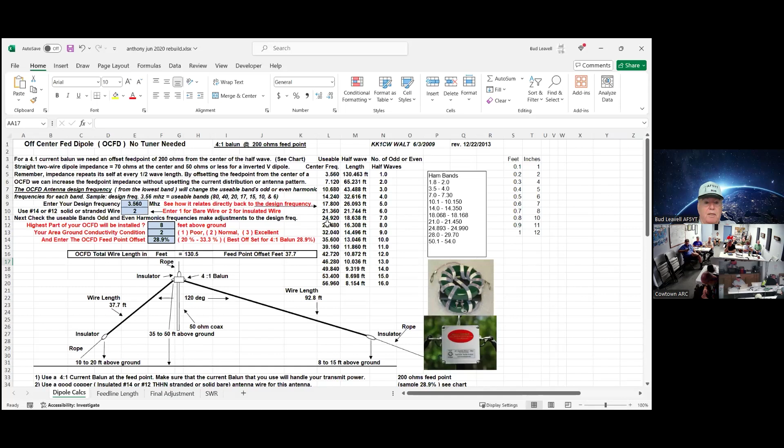Let's see. All right. So what you do with this thing is you start out up here at the top. Everything on any spreadsheet that I do, if it's blue, it's a data entry. If it's yellow, it's a calculated value. Don't change it. Look up there at the top. There's a frequency in megahertz that you place into this. In this case, I've got 3.560 megahertz as the starting point. So I want to build basically an 80 meter off center fed dipole. I can use this for any dipole, center fed or end fed, either way.

The next one underneath it is use number 14 or number 12 solid or stranded wire. This guy's smart. He was right on that. Enter a 1 for bare wire or 2 for insulated wire because the insulation will change the tuning slightly. Then why would you need insulated wire? You don't need insulated wire. You can choose and use either one, but insulated wire is easier to hide. Black wire is harder to see than shiny copper wire if you're trying to hide it.

So when you made the comment earlier about the insulation going off, the only real reason that you were concerned about that is for the aesthetics. Precisely. Well, now, when the insulation gets off of it completely, it will change the tuning of the wire a little bit. But if you follow my advice, you can always go back and tweak it, right? So no, it is not necessary to have insulated wire. I'm suggesting it because it's easier to hide. That's the only reason.

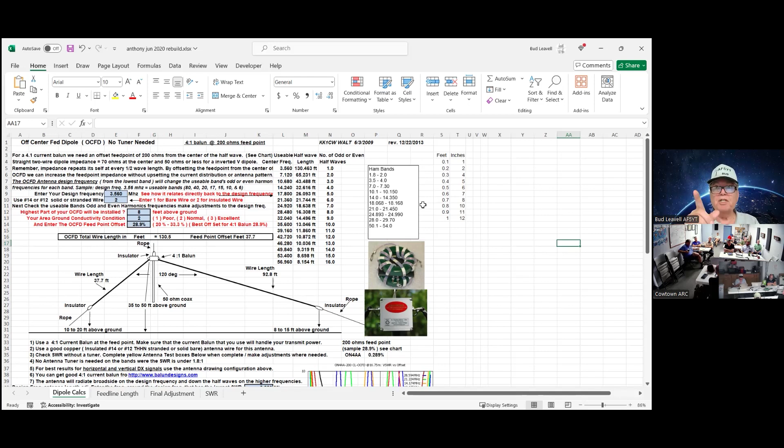Does that change if you're starting with 75 meter versus 80 meter? For an off-center fed dipole, it has to be tuned for the bottom end of 80 meters. So 99% of the time, you are not going to be able to use 75 meters without a tuner on an off-center fed dipole.

Okay. All right. So then notice underneath this, it gives you a picture and gives you a wire length. I even have a table over on the far upper right that's feet and inches. So if it's 0.2 feet, that's 2 inches. If it's 0.3 feet, that's 4 inches. If it's 0.6 feet, it's 7 inches. It's just a little quickie glance over at it. You don't have to be particularly accurate here.

Oh, I don't know why this is doing this because I've got that turned off. Plug it back in. Oh, well. There we go. All right.

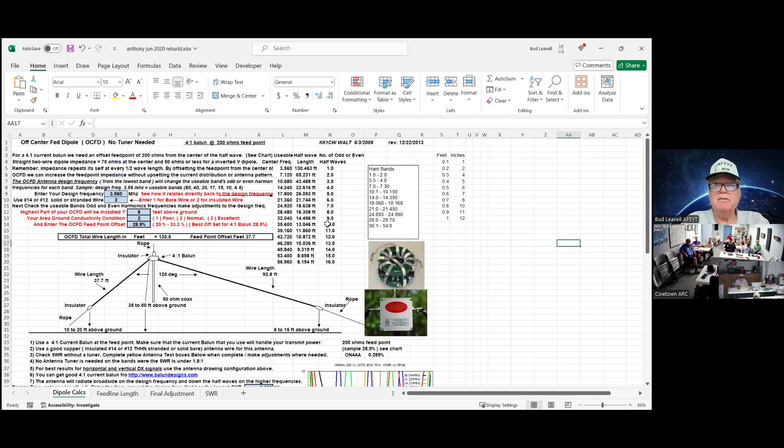Okay, so you do that. Hang your antenna, and then get out your antenna analyzer and measure the frequency on the 80 meter band that gives you the lowest SWR. I said SWR, not resonance. How do you tell when it's resonant on your antenna analyzer? X equals 0. Okay, so tune for the lowest SWR because that's where you've got the closest impedance match. Then you come in right over here and enter that frequency. I've got 3.360 megahertz in here. This is just an example. I'll just pull these out of the air.

So then it's going to tell you to shorten the short side by 2.2 feet and shorten the long end by 5.52 feet. So lower your antenna, make the adjustment, fold the end over on itself, tape it up, get it back up into the air. Now, go back and check it. You should have a real good SWR on 80 meters at the bottom end of 80 meters.

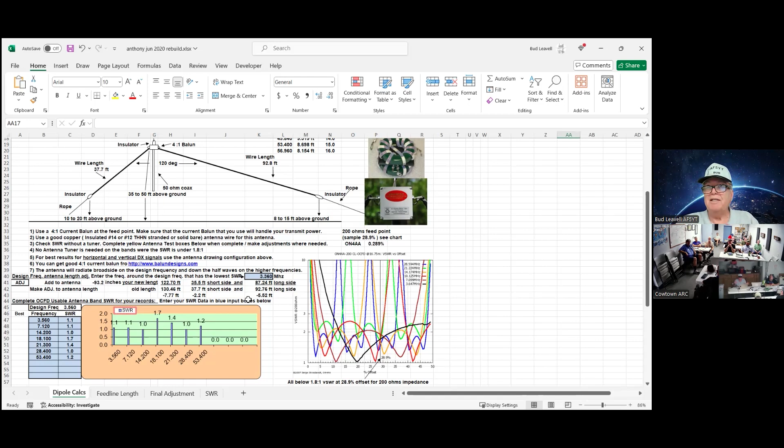All right. Now, remember that graph that I showed you where as you went up, the lowest SWR shifted either one way or the other from the band. I got to make this thing useful. So you come down here to the Final Adjustment tab, click on that, and then on this side, in any band that you're not going to use, leave the blue spot empty, and then measure the frequency at which you get the lowest SWR for each of the rest of these bands. And what it's going to do is calculate what we call the K factor, which for all intents and purposes is the velocity factor.

And then this spreadsheet will average that velocity factor and recalculate the length of your antenna. It will tell you to add 0.99 feet on the short end and add 2.44 feet on the long end. And then it'll give you the best average over all of those bands that you were wanting to operate. Now you're done. You don't have to lower the antenna and crank it back up again. Unless, of course, you want to say, I'm willing to give up 15 meters in order to get better on 10. So then you just zero out the 15 meters and let it calculate 10.

Yes, sir. When you're shortening, if you're using insulated versus not, does it make any difference if you're folding it to shorten it? No, that is exactly what you want to do is fold it.

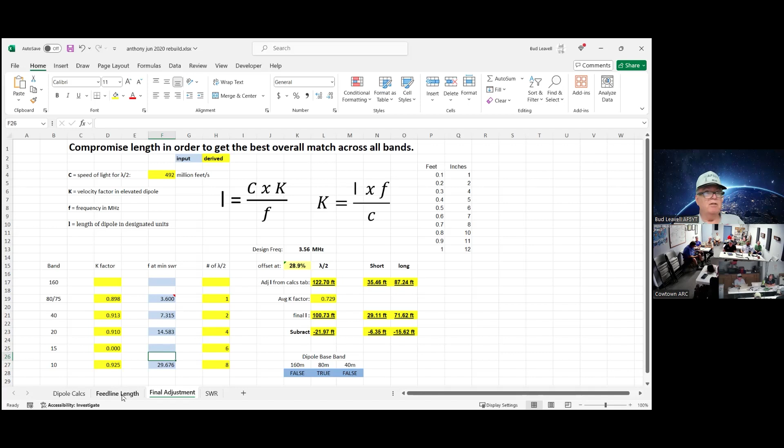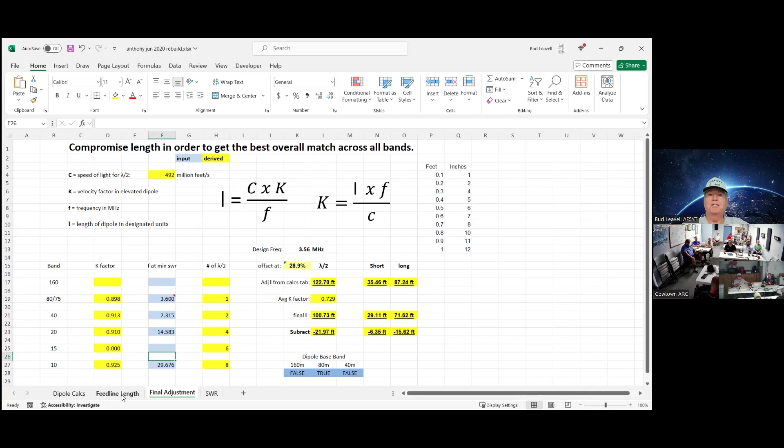Now there's one more thing I want you to pay attention to. I found, I don't know, 8 or 9 years ago, a paper on the internet that a guy did where he was testing feed line lengths that were within about 5% of an odd multiple of a quarter wave. Theoretically, whatever I connect on this end of my coax is going to show up on this end of my coax, unless it's an odd multiple of a quarter wave.

That can be a problem. I don't remember what the problem was. It skips my mind. But I went back and checked his math, did a little more evaluation mathematically, and said, by God, he's right. So I created this worksheet. Basically it's designed to give you a little tool that will keep you from getting, on a multiband antenna, a feed line that is within 5 or 10% of an odd multiple of a quarter wave for that band.

Notice over here on the left, I've got green and red lights. This will not work on Google Sheets, okay? Basically you go up here to the top and notice it says input: blue is input, brown is derived, so is yellow. Over here it shows the speed of light, fairly precise. Under units, you can select IP or SI units. If you select SI units, everything will be in meters. If you select real units, everything will be in feet.

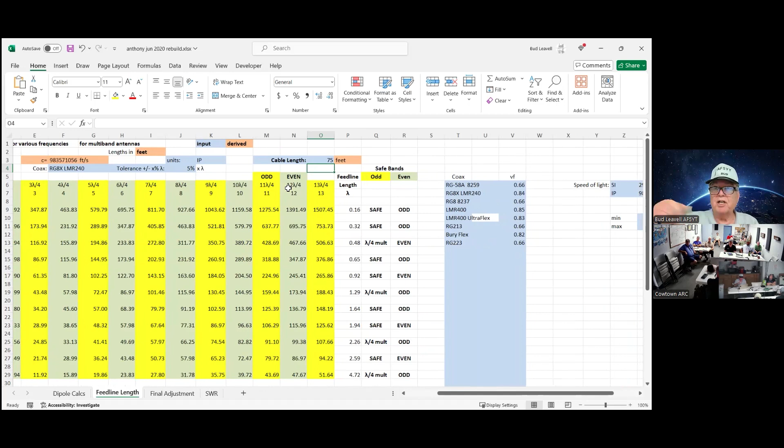What's the tolerance I'm looking for? I've got it at 5%. Over here on the edge there's a little table. You can put in the coax you want to use, and all you really need is the general velocity factor. It's usually posted by the manufacturer. That velocity factor actually varies a little with frequency, but this works well enough. So I click on that spot, there's a pull down, select the coax you want, and it gets the velocity factor off that table.

Then how long is my cable? In this case, I've got RG8X, 75 feet long. How do I know it's 75 feet? It's on the label. Seriously, I didn't measure it. It's close enough. Then it's told me that 20 meters is going to be a problem, 12 meters is going to be a problem, and 6 meters is going to be a problem.

Now, if this worksheet works on Google Sheets, and it probably does except for the colors, you can come over to the far right side, and anywhere the word safe is listed, it's green on the left. Is the quarter wave multiple even? If it's even, it's safe, green on the left. If it's odd, it's red on the left. It's that simple.

Your feed line, is that everything starting at your radio? From the tuner to your bulkhead to a lightning arrestor, or is it just from the tuner? I would say from the tuner, yes. That's kind of nebulous, okay? But I would say from the tuner, from the last device that has discrete devices in it, like the tuner.

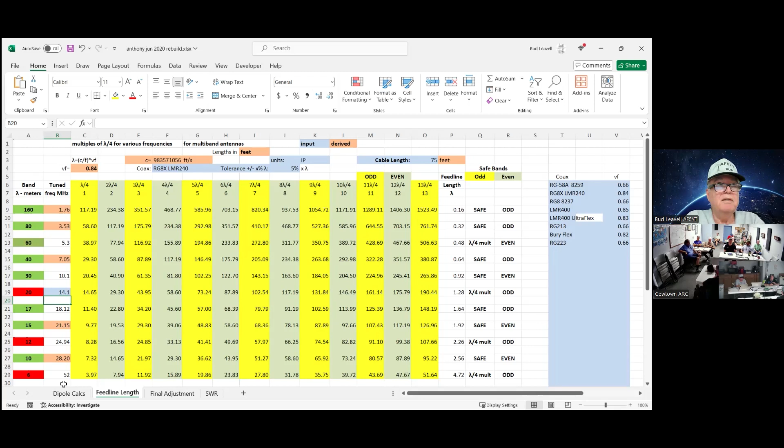My question is on specifics on the OCF. Okay. So the question is, if we have an efficient 49-to-1 end-fed half wave, compare that to an efficient OCF 4-to-1 balun, is there a reason to prefer a 4-to-1 over a 49-to-1? The 4-to-1 you're going to use on an OCF. The 49-to-1 you're going to use on an end-fed. Does the 49 or the 4 make any difference to you as long as both are efficient? No. Now I mean they have to have their purpose.

I understand you're tuning a 2450 ohm piece of wire on the end-fed half wave. No, the end-fed half wave, it's not a 50 ohm. It's nearly infinite. That's the reason. The wire alone, yes. So then you're going to put an unun on it, 49-to-1 to get you to 50 ohms. Guess what? You ain't at 50 ohms, because infinity divided by 49 isn't 50. Okay, it's just you're closer. You're still falling. Yeah, basically, that's a fact.

So you're working with a more steady calculation if you're doing an OCF. The OCF feed point can vary anywhere between 200 and 300 ohms. Remember, with a center fed dipole, if it's horizontal, that feed point is 72 ohms, not 50. To get it down to 50 ohms, you've got to droop it into an inverted V. The same's true here. If it's straight across, it's really 300 ohms at the feed point, not 200. So droop it at 120 degrees and it'll come to 200 ohms.

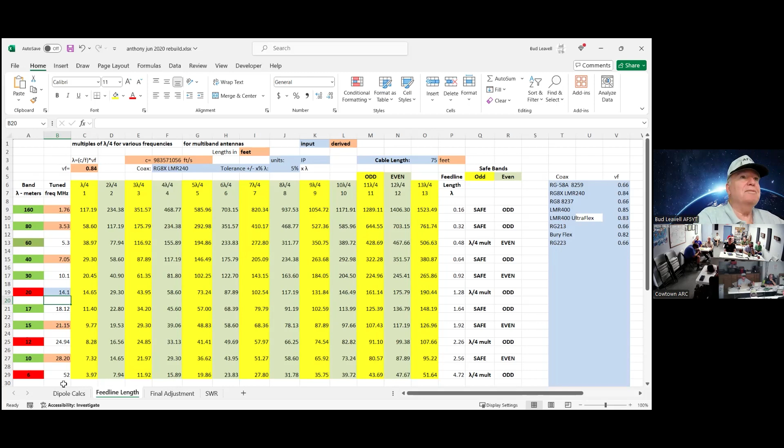But guess what? The difference between 200 ohms and 300 ohms divided by 4 is close enough. Twice the number of ohms is a 2-to-1 SWR. So if I've got a 50 ohm interface, but the feed point is actually 100 ohms, I've got an SWR of 2-to-1, which is, if it ain't broke, don't fix it. So basically what I'm saying is as long as the SWR stays low, don't worry about it. Plug it in, see how it works.

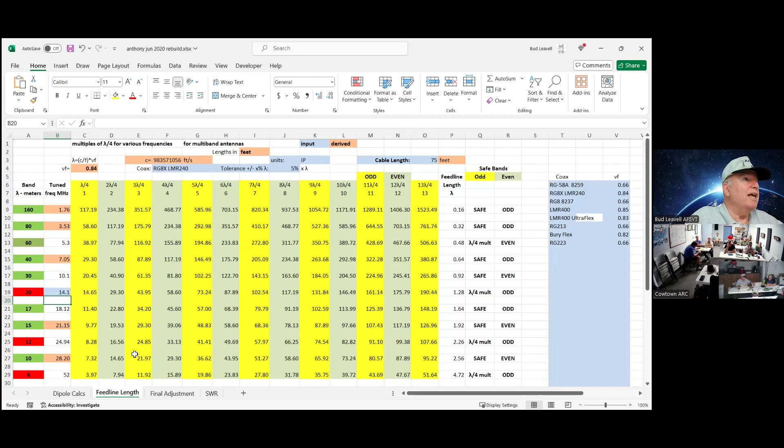This is Bud's second law of antennas. The longer the radiating element is, up to a quarter wave, the more efficient the antenna is going to be. And Mike had a couple comments. Mike, you want to explain your post in chat? Any questions or comments on that?

Well, I searched for the antenna, and the first link was, I guess, an older version. It looks like it's the exact same numbers. The second link is, I guess, the current version that includes how to rig it up if you want 80 or 40, using a coil. So basically, they're the build plans and the SWR outputs and how long the radials have to be.

Are you talking about the POTA Performer? Yeah. Okay. He updated the POTA Performer within the last month or two, and I have the specs. I sent them to Sam and Rebecca too. I'm happy to send them to the whole group. Do those specs include the lengths for the segments for the radials? They did on the second version, which is the version Sam and I have. I do not know about the third version. Because the version that Sam sent me only has them through 20 meters.

Okay. So yeah, it would be nice. Otherwise, we'll have to do some calculating to figure out. I know he said on the second version for 40, you just take the entire 20 meter one, and instead of having two radials, you just use one, and it does work. I've used that. I did some calculations based on what he had extrapolated, and so I've got the dimensions for the elevated radials for 30 and 40 meters. So I can share that.

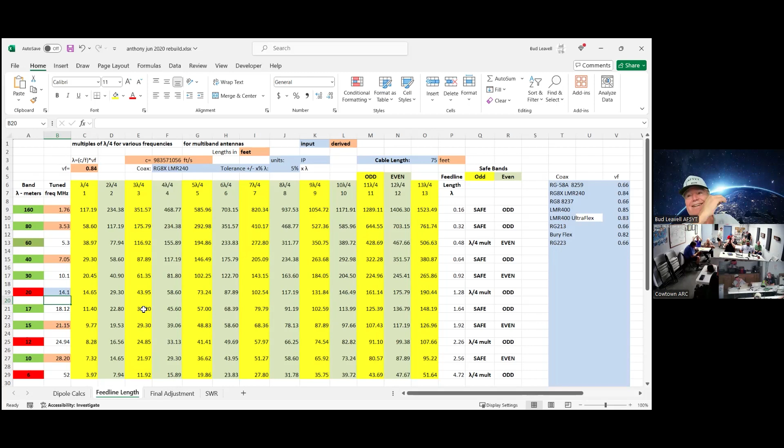No, seriously, it's terribly reactive, and I'll show you because I've got the Rig Expert scans. So basically, in a nutshell, that antenna sucks. So stop making all these contacts. But it goes back to that earlier point. It doesn't have to be perfect, because the difference between S9 and S8 is you can't hear it. It's just not there. That's like 6 dB. That's 4 times change in power, right?

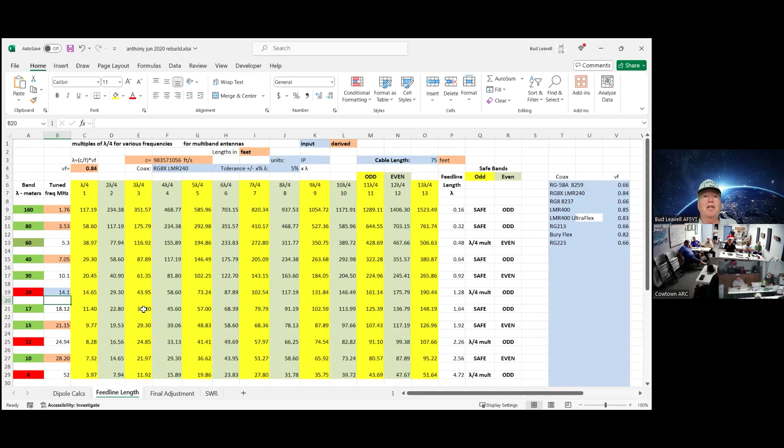So we've got inefficiencies in the antenna, and you probably noted I was emphasizing, let's make it efficient. You want to try and make it efficient, but then you got to deal with what you got to deal with. The world is what the world is. I live in it, and I got to deal with it. So we work with what we have.

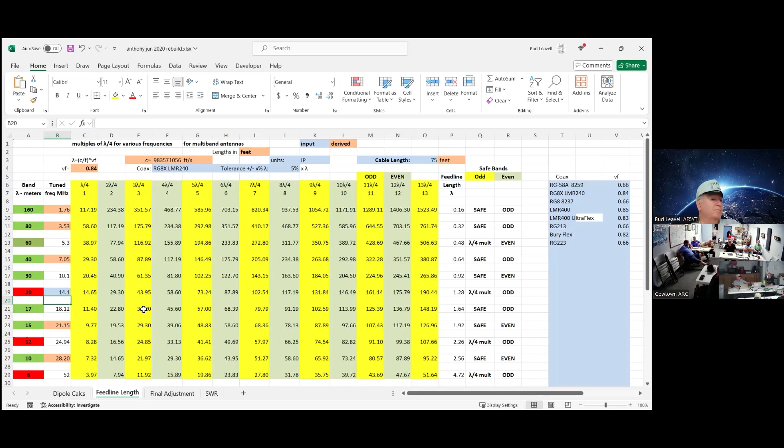And I will say this: since I'm visually impaired and blind, I'm using amateur radio and seeing through the airwaves who I can make contact with. It's amazing what I'm seeing.